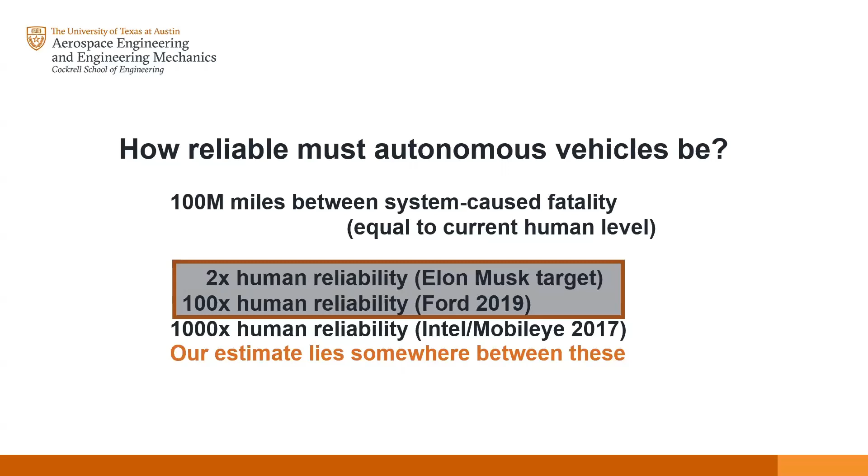We at the University of Texas Radio Navigation Lab predict that autonomous vehicles must be between 2 and 100 times more reliable than humans, based on the measure of roughly 100 million miles between human-caused automobile fatalities. Towards solving this problem, we frame our work in terms of a trilemma, a choice between 3 undesirable options.

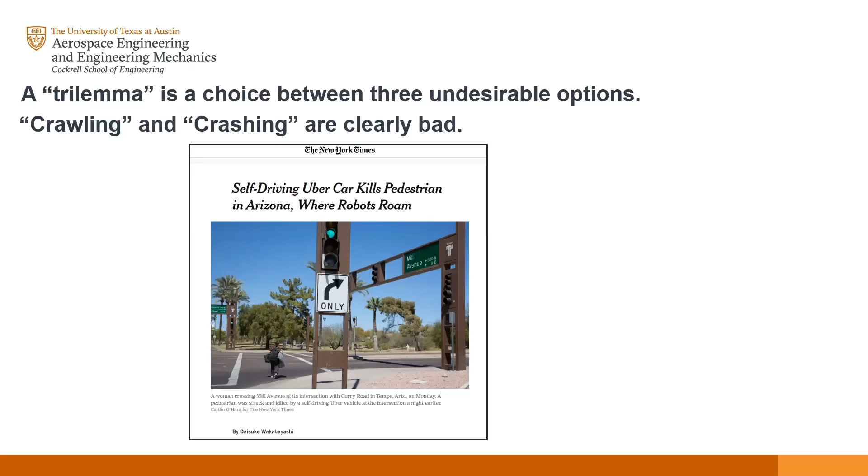Automated vehicles, when they lack enough information about their surroundings to make critical decisions, face a choice between crashing, crawling, and cooperating. They may crash if they lack information about nearby hazards, and they are unaware of that shortcoming. Alternatively, they will slow to a crawl if they know that they lack that information for safe decision-making. On the other hand, they may seek to remedy the situation by cooperating with nearby sensor-equipped vehicles and sensing infrastructure.

Cooperative sensing, while clearly the path to safe autonomy, comes with issues of its own. Data exchange may be limited by bandwidth and cost considerations. There's also the challenge of ensuring that data from external sources is trustworthy enough to base safety-critical decisions on. Finally, data about one's surroundings requires both the source and the recipient of shared sensing data to know each one's pose within a common reference frame.

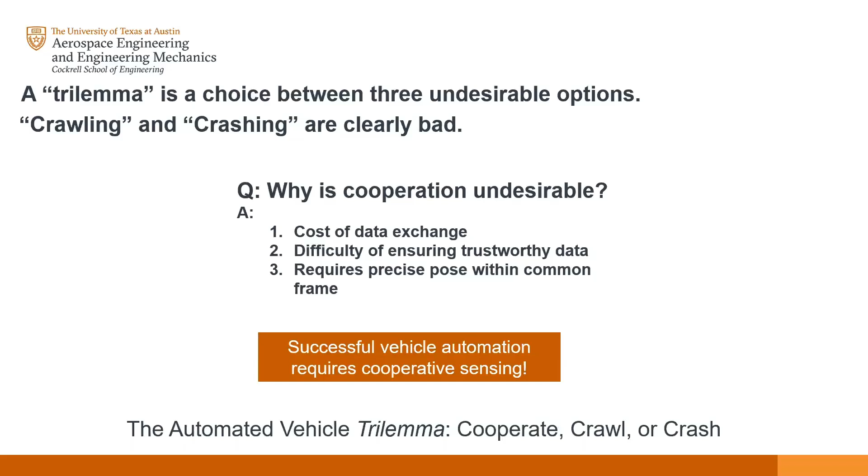The main contribution of this work is to present a framework for quantifying the benefits of cooperative sensing and to demonstrate its use. The technical approach can be broken down into 3 parts. First, we estimate precise poses for the vehicles. Second, we combine sensor measurements in the form of ranges to obstacles into a shared probabilistic dynamic occupancy map.

Third, we use the vehicle poses in the occupancy map augmented with a cost function to compute the expected cost, or Bayes risk, of collision. The risk measure is accumulated over all cells where our ego vehicle may exist, according to its pose uncertainty, and added for each time step to produce an estimate of accumulated risk at each epoch.

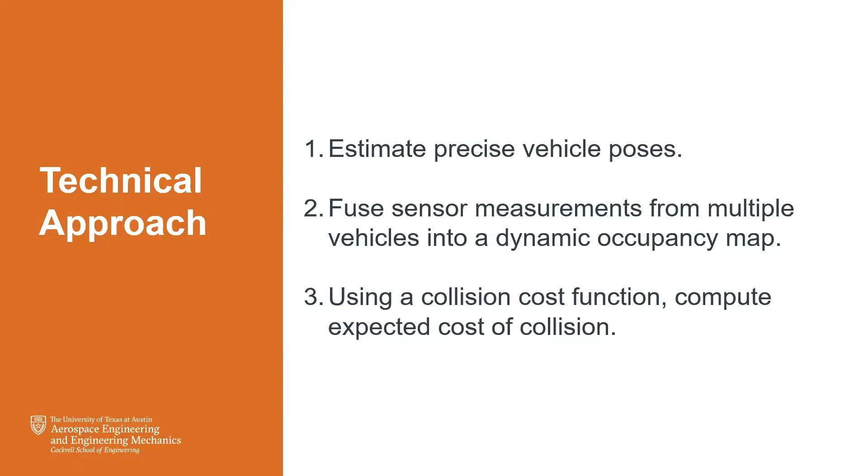A necessary condition for useful cooperative sensing is precise localization. By precise, we generally mean that position data must have errors of a few centimeters or less. While this is a high bar to clear, it is eminently within the capabilities of vehicles equipped with commercial-grade GNSS receivers and antennas. Additionally, we wish to demonstrate collision risk quantification with ubiquitous, low-cost sensing modalities like visual light stereo cameras over more expensive ones.

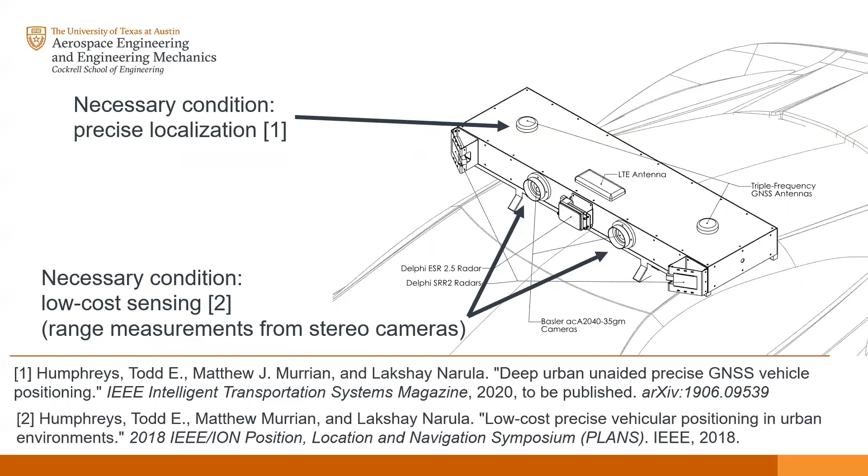Random finite set, or RFS theory, provides a mathematical framework for reasoning about tracking multiple dynamic targets. Finite volumes of space in a grid discretization can be modeled as Bernoulli random finite sets. Grid cells are a useful abstraction for reasoning about spatial occupancy of obstacles. Dynamic occupancy probabilities are propagated from epoch to epoch with the nearly constant velocity particle model.

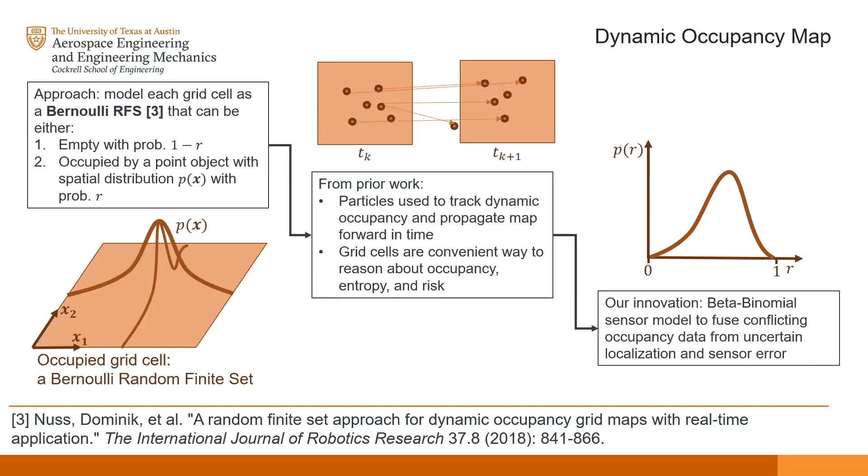Although it can be computationally expensive to track dynamic particles representing occupancy in unobserved regions of the map, the hybrid particle grid formulation augmented with random finite set theory enables us to explicitly handle both seen and unseen obstacles, updating based on measurements where appropriate. Representing occupancy probabilities as beta random variables when performing Bayesian updates ensures that sensor measurement uncertainties are accounted for when updating the map.

The hardware we use for data capture to demonstrate our approach is the University of Texas Sensorium automotive sensor platform. The Sensorium is equipped for dual antenna triple frequency GNSS positioning alongside stereo camera and radar measurements. Of course, to demonstrate cooperation between vehicular sensor platforms, you need more than one. Both were deployed in downtown Austin, Texas, at a busy urban intersection.

Here, an overhead view from Google Maps is overlaid with the centimeter-accurate vehicle trajectories. In this blind spot scenario, a pedestrian in yellow crosses the street, but a bus conceals them from the view of the ego vehicle, the blue trajectory. The cooperative vehicle, the red trajectory, provides information about the pedestrian and other vehicle traffic.

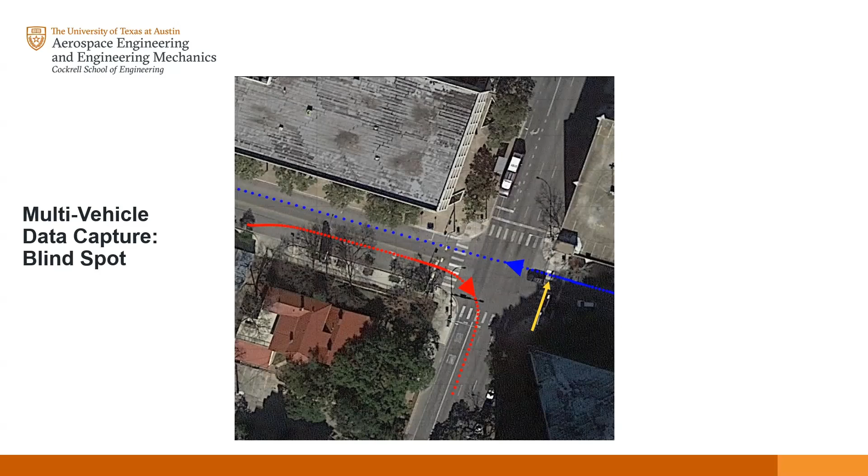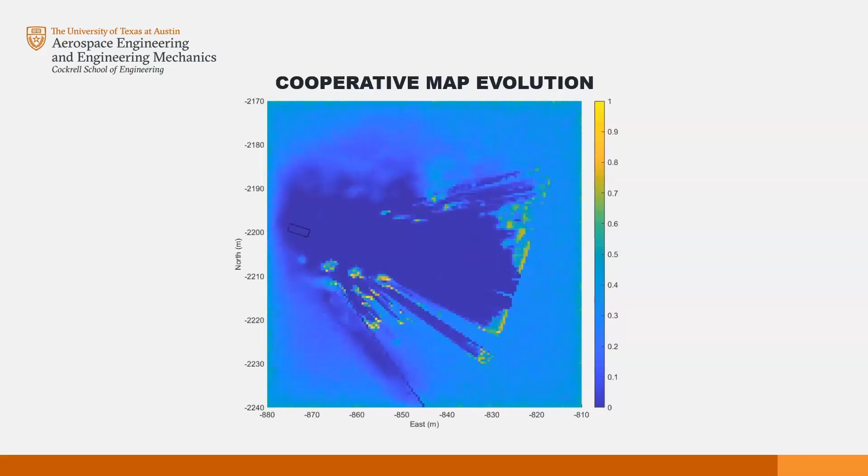This animation shows the evolution of the dynamic occupancy map over time. The ego and cooperative vehicle positions are shown as black rectangles. Dark blue coloring corresponds to low probability of occupancy, while yellow corresponds to high probability of occupancy. The axes are east-north 2D position in meters relative to a known reference.

Initially, only the sensor measurements from the cooperative vehicle are present. The ego vehicle's sensor measurements are included once it begins to traverse the intersection. Clearly visible are static obstacles like buildings and trees, as well as dynamic obstacles like cars and pedestrians.

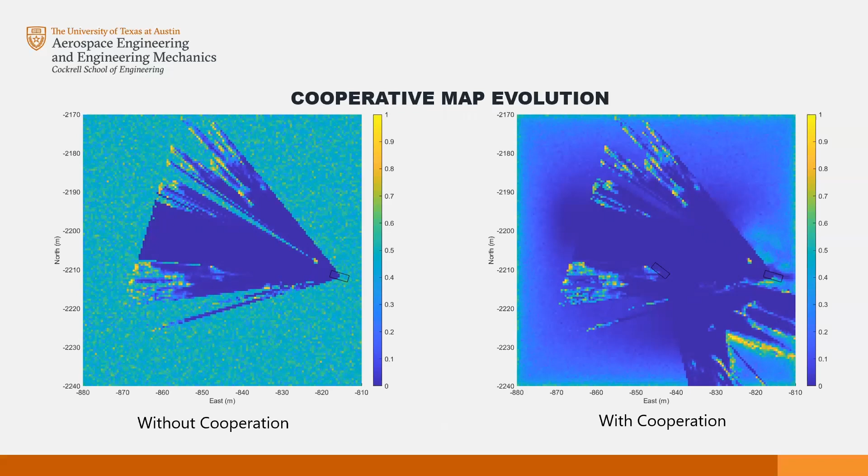Let's compare the map evolution with and without cooperative sensing using two frames representing the same instant in time. In the figure on the left-hand side, the ego vehicle relies entirely on its own sensing to build the map. In the figure on the right-hand side, the map is constructed using data from both vehicles. The ego vehicle is able to use the prior occupancy probabilities established by the cooperative vehicle to improve its knowledge of its surroundings, as shown by the greater area in dark blue.

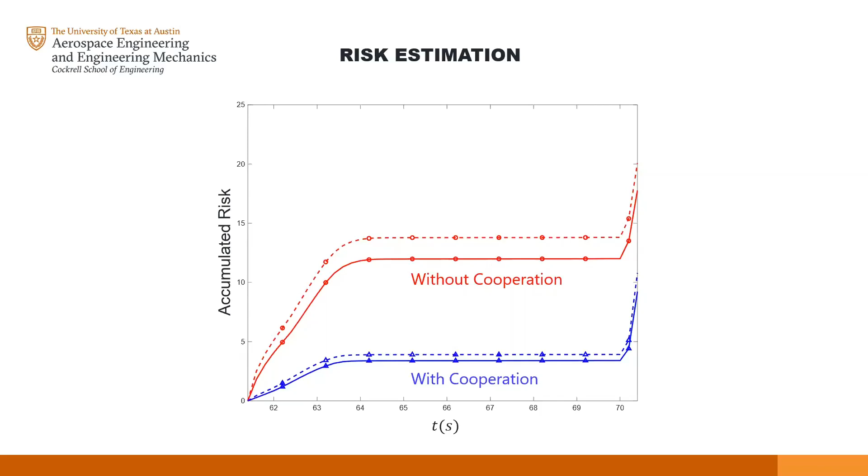Back to the trilemma, a choice between 3 undesirable options. Automated vehicles, when they lack enough information about their surroundings to make critical decisions, face a choice between crashing, crawling, and cooperating. In this case, the ego vehicle's driver elected to initially crawl to avoid colliding with the pedestrian. But we can see from the plots on the last slide how cooperation would have helped as well.

Of course, our scenario was conducted in a way that ensured a safe outcome. However, that may not always be possible in real life. The ultimate goal of this work is to permit automated vehicles to achieve high safety standards without sacrificing performance. We are still working on how to best conduct the cooperation we presented, but we believe that this work quantifies the need for it.